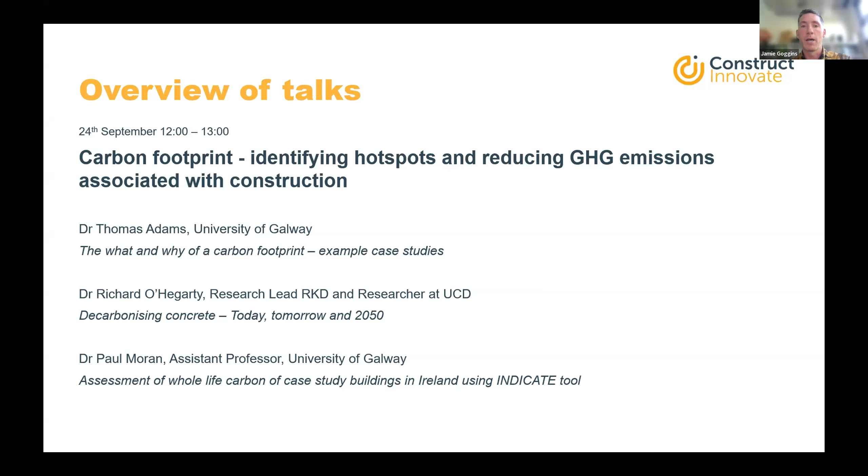I'm Thomas Adams. I'm just coming up to the end of my PhD in civil engineering at the University of Galway, and it was on the topic of sustainability reporting. A subsection of that I'll be talking about today is carbon footprinting, looking at the what, the why, and the how of the carbon footprint, with some examples and case studies from the construction industry.

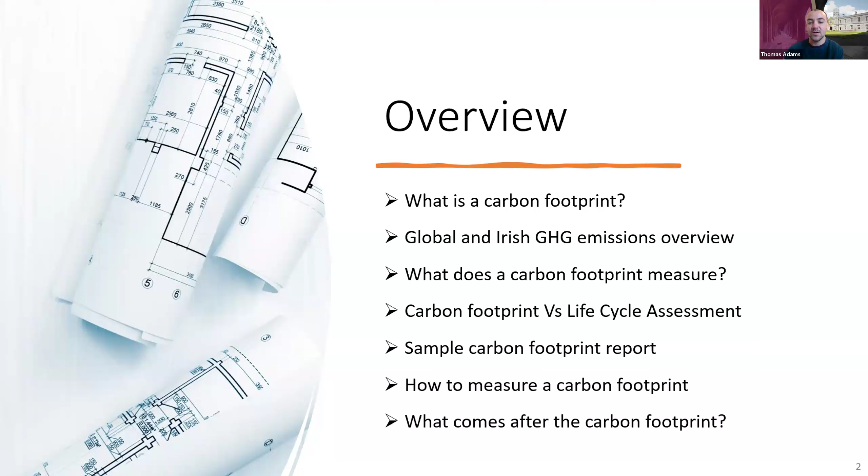An overview of the presentation: first looking at what is a carbon footprint, some global and Irish overview of the whole emissions picture, looking at what a carbon footprint measures and comparing it to life cycle assessment, and then a sample carbon footprint report, how to measure and what comes after you measure.

First of all, at a very basic level, what is a carbon footprint? It's a methodology to try and capture all of the greenhouse gases emitted from activities that we do. This graph on the left shows the four main greenhouse gases - carbon dioxide, methane, nitrous oxide, and fluorinated gases. The way the arrows jump in size represents how much heat each of these gases traps. Carbon dioxide actually traps the least amount of heat, followed by methane, nitrous oxide, and fluorinated gases, which trap loads of heat in terms of that greenhouse gas effect.

The pie chart beside it shows why we call it the carbon footprint - because carbon dioxide is the one we emit the most, by far. That's the idea behind the carbon footprint, a way of measuring these different greenhouse gases. They're also converted back into one unit of carbon dioxide equivalent, which is why we call it the carbon footprint. Methane, nitrous oxide, and fluorinated gases are converted into carbon dioxide equivalents, so we have one unit for measuring the global warming potential of our activities.

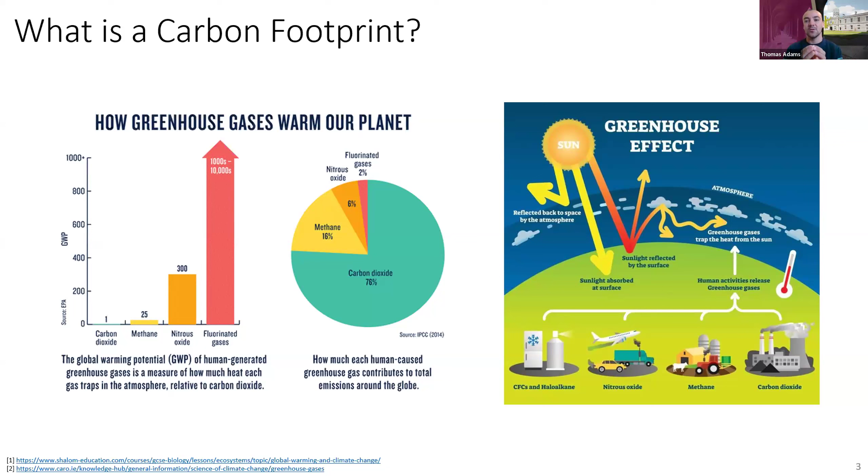This is an overview of the global greenhouse gas emissions, from 2016. It's probably changed a little since then, but it gives an overview of the different activities we do as humans that emit these greenhouse gases. I have some bullet points on the left linking the main ones to the construction industry - looking at energy use in industry, the first chunk there is iron and steel at 7.2%, which is pretty significant and fairly related to construction.

You'd think energy and transport, transporting construction materials to and from sites, would be fairly significant too. And then there's the big chunk of energy use in buildings - obviously that's the operational use of the building rather than its construction, but that's of course affected by how energy efficient we build our buildings and how we use them.

Looking at the small industry chunk there, 3% of that 5.2% is just cement. I'll let Richard go into more detail on that later, but you can see how cement makes it onto this big picture of everything we do. Cement is 3% of that big picture. And then waste, if we put our waste in landfills, it can be fairly significant. Also deforestation in some cases can be related to construction.

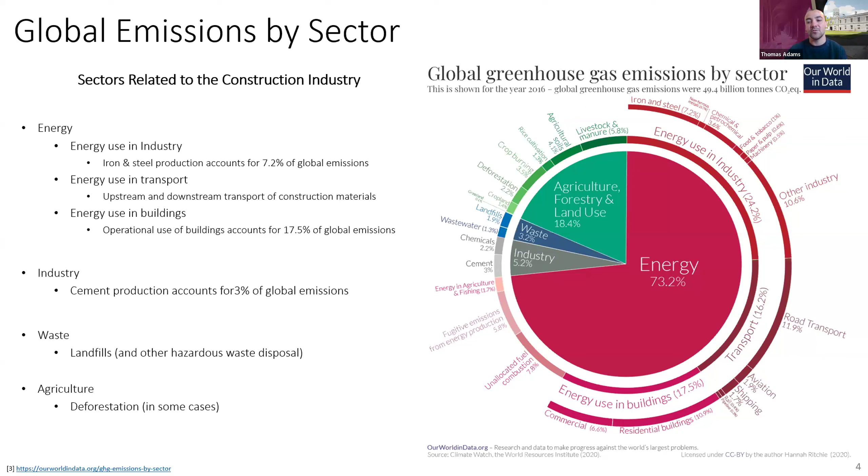Looking at the big picture in Ireland's case, this is the 2023 overall carbon footprint of Ireland as a country. You can see agriculture has that big chunk. As we all know, agriculture is the main source in Ireland, followed by transport and energy industries. The table on the right, the green shows that it was actually reduced from 2022 to 2023. Overall at the bottom, you see we actually had a relatively significant drop in emissions on a national scale for the first time.

I do think we had a drop the year before, but it was only about 1 or 2%. This time, whether or not you include land use change - LULUCF is land use change and forestry - something went wrong in the way we manage our lands, as we had such a big jump from our land use. But overall, there was a 4 or 7% drop, depending on whether or not you include land use.

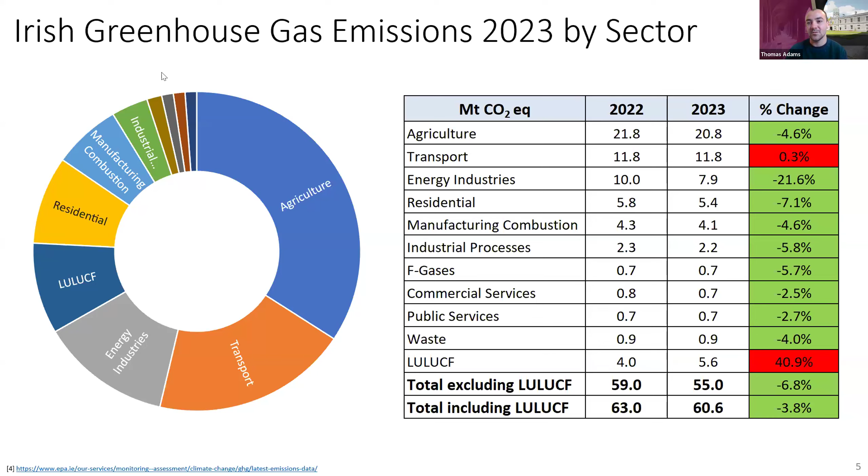So what is actually measured in a carbon footprint? According to the Greenhouse Gas Protocol Corporate Standard, which is the most commonly used standard globally for measuring carbon footprint, emissions are grouped into 3 scopes. Scope 1 is fuels burned directly on site, generally heating fuels, or company vehicles or machinery that burn fuels also.

Scope 2 is purely just electricity that you purchase from the grid. It's called indirect because the emissions aren't coming from on site, they're coming from wherever the electricity is produced. And then scope 3 is all other indirect sources of emissions.

The main ones here would be purchased goods and services, which is essentially the supply chain for your company - materials, products, and services that you purchase, and the emissions associated with buying those things. Another significant one is travel, mainly how employees get to and from work, but also if your company funds a lot of business travel, that can be significant too.

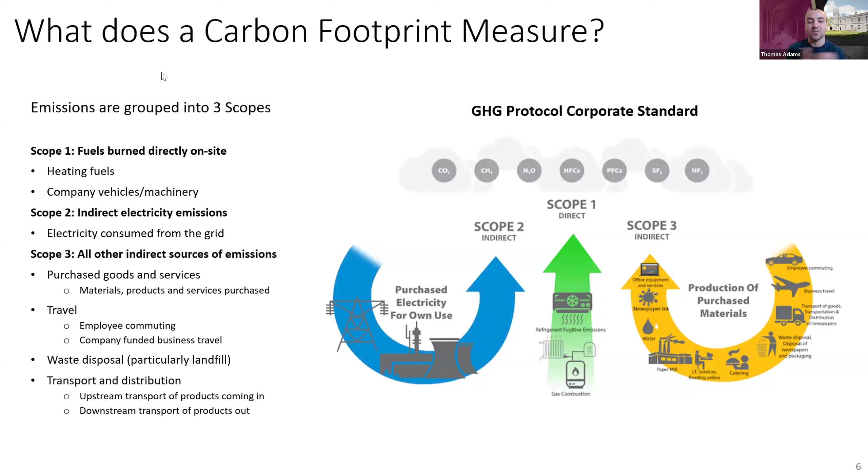Waste, as I was saying, if it's sent to landfill, that has a pretty significant carbon footprint associated with it. And also transport and distribution, particularly for the construction industry - moving heavy materials to and from site can have a pretty big footprint also.

Comparing this to life cycle assessment - Paul will go into more depth on that later - but to give an overview, this image shows how the life cycle assessment has 5 main stages: material extraction, then manufacturing and production, transport, utilization, and disposal. The life cycle assessment tries to get the full picture of a material from when we take it out of the ground to when we put it back wherever we put it back.

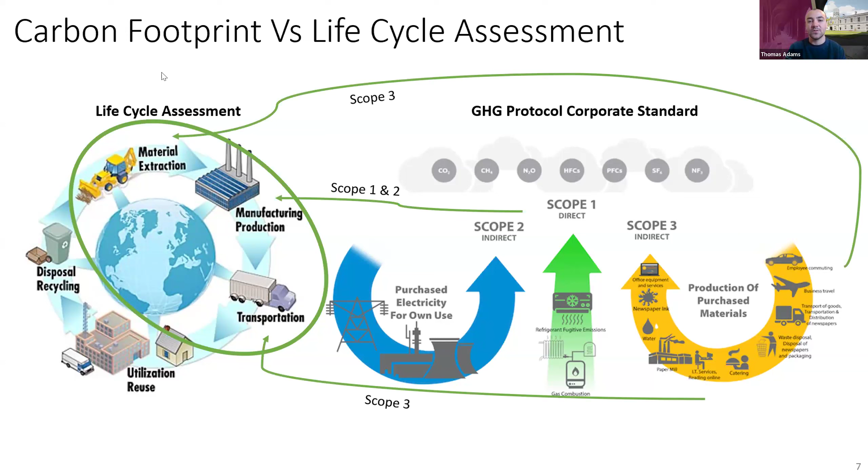Whereas the carbon footprint generally only covers 3 of these: material extraction, manufacturing and production, and transportation. You can map how scope 3 would cover material extraction, scopes 1 and 2 would cover what happens in the factory, and scope 3 again would cover transport away, but it generally doesn't take into account the other 2 - utilization and disposal. So just to note, the carbon footprint isn't completely extensive.

But the benefits of doing a carbon footprint are that it gives you that overview of the whole organization's activities and the emissions associated, which is useful for planning down the line. A life cycle assessment tends to focus more on one project or one product, whereas the carbon footprint is for the whole organization. It's also not as complicated to do as a life cycle assessment, so it's relatively straightforward - just a case of gathering a lot of data, which is generally the hardest part. And in terms of creating a pathway to net zero, measuring a carbon footprint is the first step in creating that action plan towards net zero.

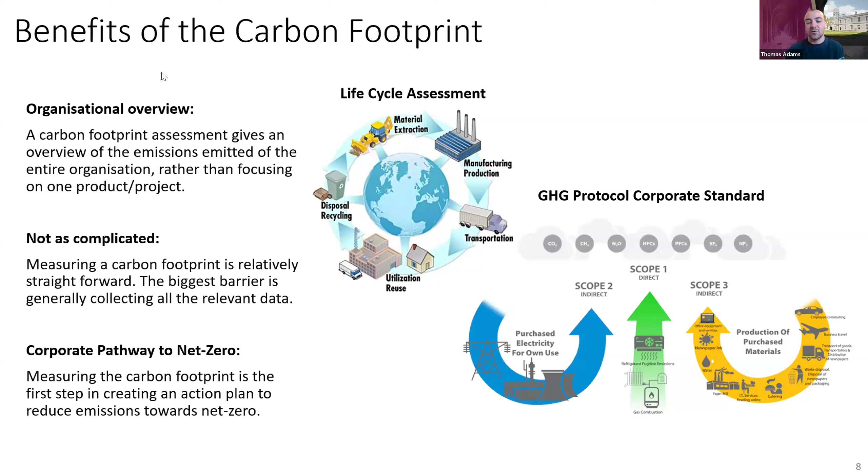Here I have a sample carbon footprint report. This is from an Irish manufacturer of timber frame, roof truss, and posijoist products. It's a factory with 60 employees, and they produce about 400 timber frame units a year.

You see the two small bits on the graph here, the black and the green, that's scope 1 and scope 2. So the heating and the electricity are those two tiny little squares on the left. Everything else is scope 3.

The yellow part is transport and distribution, that's the trucks taking the timber frames and roof trusses to site. The red chunk is travel, that's all 60 employees getting to and from the factory every day. And then you have the little chunk of waste.

These big blue chunks here are all the supply chain. I've separated them out a little by product because it was so huge. The biggest chunk is timber, which makes sense given that's their business, manufacturing timber frames. The next one is construction work, then metal products, and then other purchased goods and services. The key thing to highlight here is how the supply chain really has a very significant impact on the carbon footprint for a construction industry.

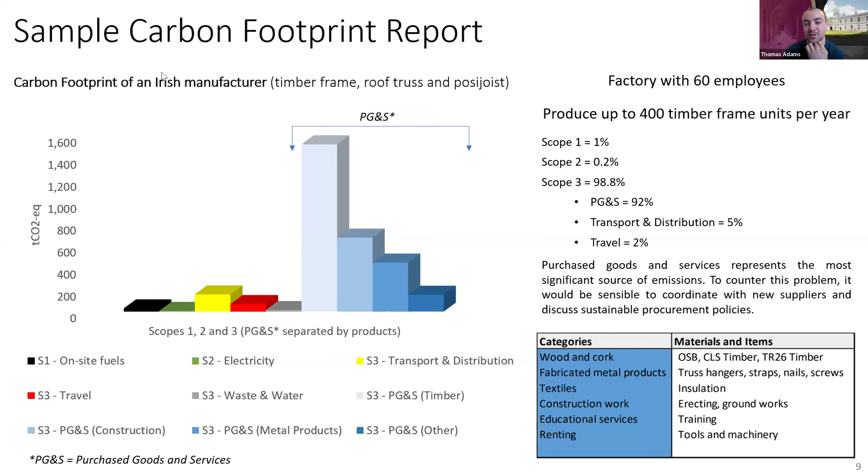This is the second last slide, just how to measure the carbon footprint. You start off by selecting a base year, which can be any given year. Going further back in time allows you to analyze the trend. If you could go back to 2010 and bring it up to now, you'd have a lot of data to look at in terms of where emissions went up or down over the years. But data isn't always available that far back, so generally we pick a year where we have all the data available and fill in from there till now.

Collecting the data is generally the most time consuming part. We recommend using a commuting survey to collect all the commuting data. And in terms of procurement data, the purchased goods and services data, it's easiest to sort those by the largest product, like the timber in the last example, or the largest supplier, to break the data down.

And then we also talk about activity data versus spend data. So for timber, for example, if we knew the weight in kilos or even the volume of timber ordered that year, that would be more accurate. You get more accuracy out of that data if you can get it in weight or volume, as opposed to the amount of money spent on it. But if you can't get it in weight or volume, we do have emission factors for spend, so we can still use that anyway.

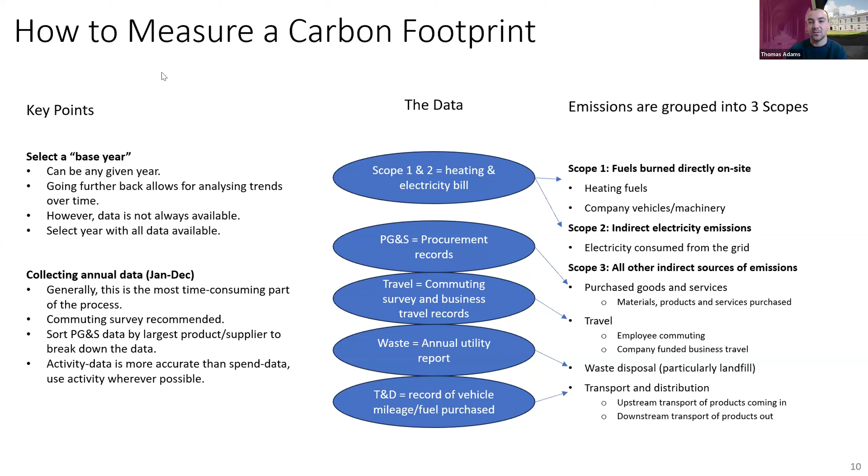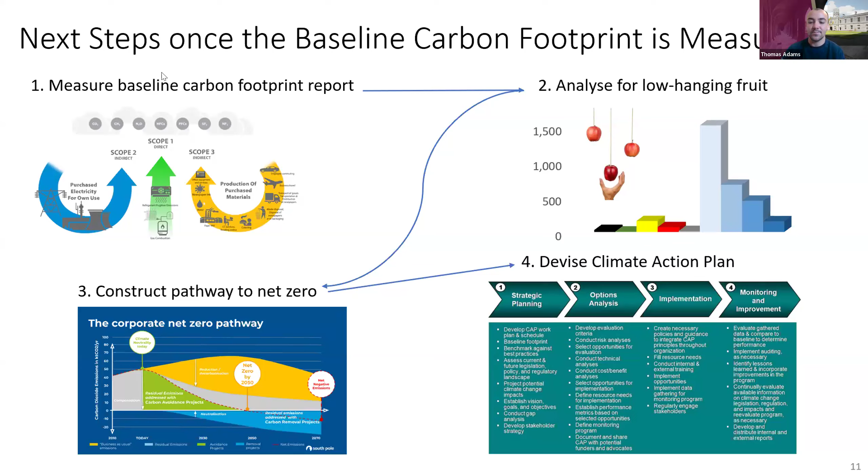Finally, the whole reason to measure the baseline carbon footprint is it gives you the chance to analyze where you're at and look for low-hanging fruit in terms of decarbonizing. Once you have that set out in terms of what you can decarbonize today, what you can do next year, what you can do in 10 years' time, you can put together your pathway to net zero, ideally bringing all those different emission streams down to zero. Then when you have that pathway, you can devise your climate action plan, breaking it down into a step-by-step process to decarbonize. And that is the end of this.

So that's a great introduction to carbon footprinting and carbon dioxide emissions, showing the level of emissions that can be associated with purchased goods and services for an organization.

When we built a large building at the University of Galway in a given year, the emissions associated with that building came to be nearly similar to all other emissions of operating the university in that year. And this is a university with 20,000 people, student staff and students, so a very big operation.

So we can see that construction has a very big impact on some organizations in terms of their overall carbon footprint, and therefore need to consider it if they're considering scope 3. So how are we going to decarbonize construction? One of the main components in construction that leads to large greenhouse gas emissions is the use of concrete and cement. Dr. Richard O'Hegarty is going to talk us through concrete and how we're going to decarbonize it from today, tomorrow, and all the way out to 2050. So over to you, Richard.

Thanks for the intro. As Jamie mentioned, the biggest hotspot when it comes to most buildings is concrete. So what we're going to talk about today is decarbonizing concrete - today, tomorrow, and 2050. Today being what we can do right now, tomorrow being the short-term horizon, and 2050 being the longer term.

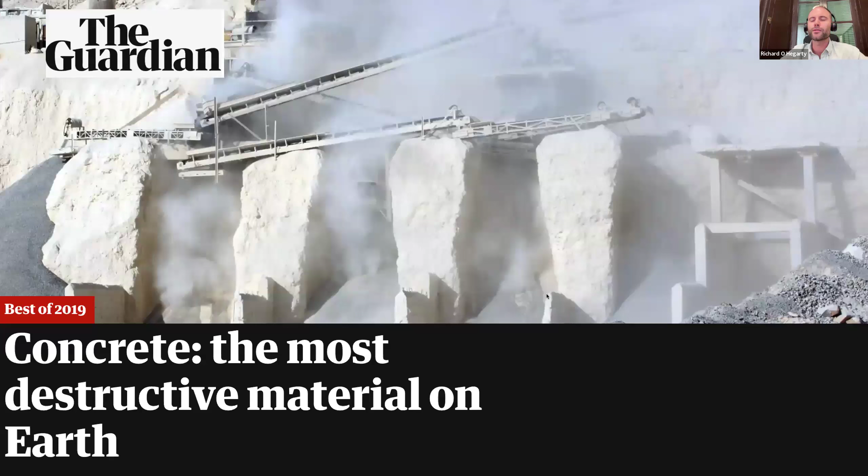Probably the best place to start is a provocative headline from The Guardian in 2019, which was: 'Concrete, the most destructive material on Earth.' An interesting choice of word, destructive. I would probably go with impactful, but let's go with their choice of word for now.

And yes, it would be the most impactful, or destructive to use their word, simply because it's the thing we use most of. This graph is a study of material flows in different countries with different income bands, and you can see that no matter where you are in the world, concrete is used, obviously at different rates. The shaded blue portion is your concrete, the darker blue is asphalt - I've included that to show there is a difference in, say, higher income countries versus lower income countries.

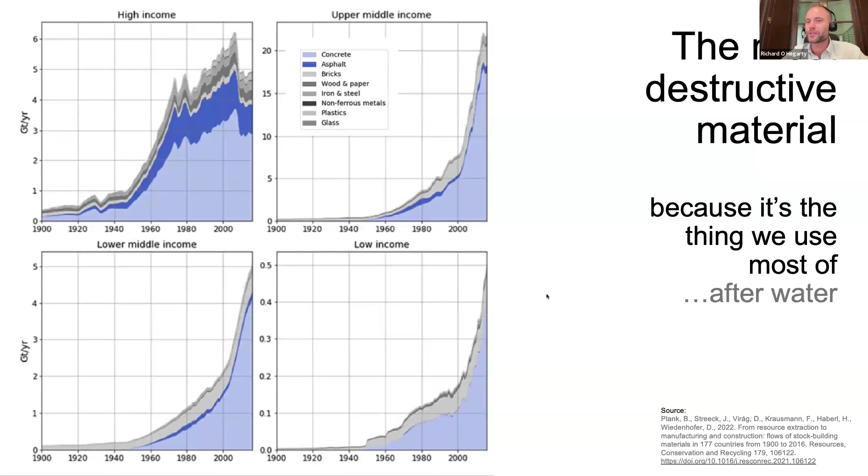So we use a lot of concrete, and I suppose the question is, why do we use a lot of concrete? The answer to that is long, but it can be found in this book called Stuff Matters by Mark Miodownik. It was recommended to me by my colleague in UCD, Oliver Cannan, and chapter 3 is called Fundamental - that whole chapter is about concrete, because that's what concrete is to modern society. It's fundamental. No matter what you do in your daily activity, concrete is involved somewhere.

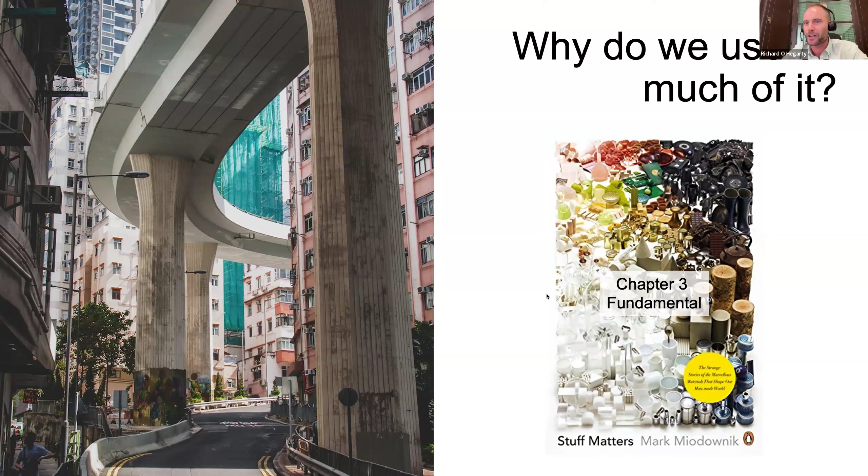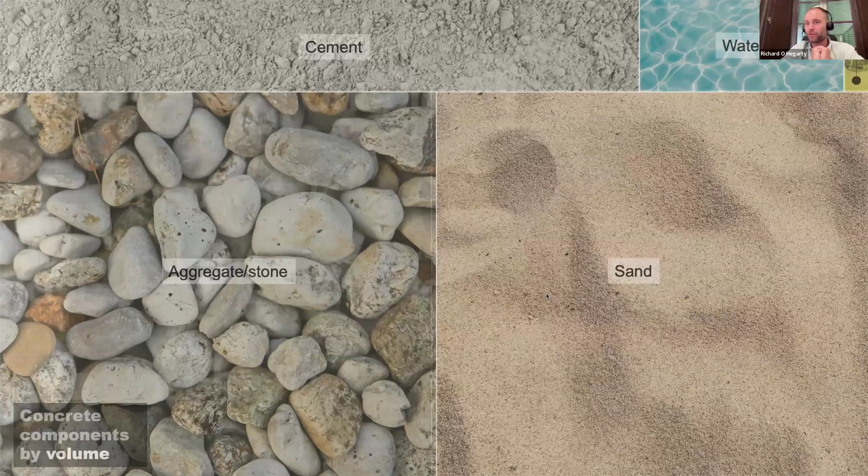But one way of looking at it, which can be quite useful, is to look at what it's actually physically made up of. In terms of volume, this is approximately what concrete is made up of - primarily sand and aggregates, about 80%, then a portion of cement, a bit of water, and then some chemicals. That's a useful framing if you're a concrete technologist trying to look at what's in the material itself. Since this talk is about concrete decarbonization, I think this can be a useful framing for how to actually look at concrete.

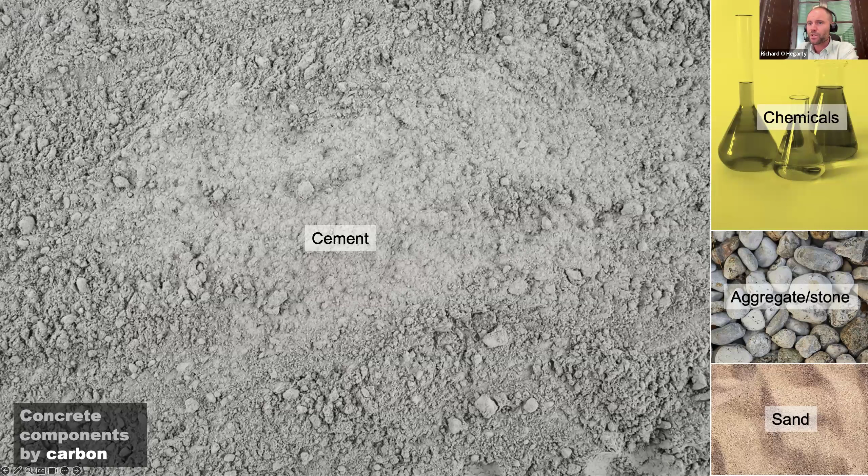You can clearly see that the big portion of emissions is in the cement. As noted in the last presentation, cement is a big portion of global emissions, and when it comes to concrete, the biggest portion of emissions is due to the cement. So why is that the case? Well, there's two major sources of emissions when it comes to cement production.

Approximately 40-60% - this can change depending on your manufacturing process - but approximately 40% is from the energy used to achieve the high temperatures required to burn limestone, a temperature of 1,450 degrees, pretty high. You typically need fossil fuels, but there are other fuels used. There's actually some progressive work being done in some Irish cement manufacturers.

So there are ways to reduce that, but the big challenge is the calcination part. That's conversion of limestone, which has the chemical equation CaCO3, into lime, and what you have left over is CO2. Obviously that's not good, and it's hard to break this because that's just the chemistry of converting limestone into cement.

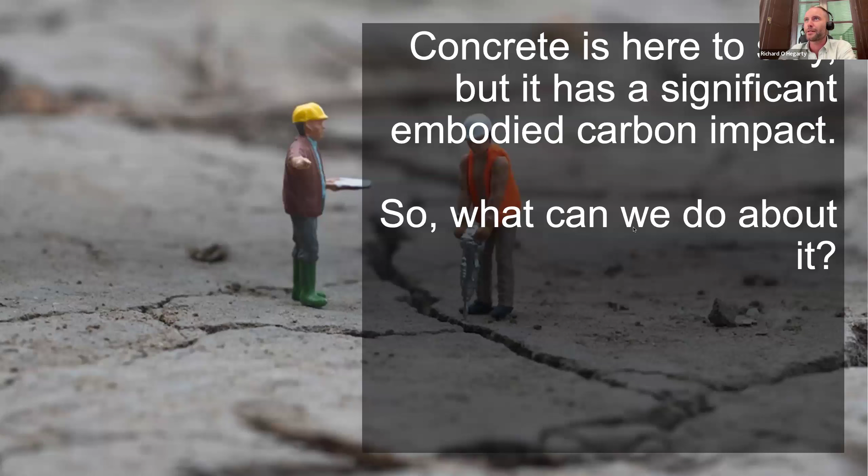So in summary, concrete is here to stay, but it has a significant embodied carbon impact. So what can we do about it? I think this is the crux of the presentation, and the framing of it is a 3x3 matrix: today, tomorrow, and the longer term. We've also categorized some of the solutions into use less cement, use less concrete, and capture more carbon.

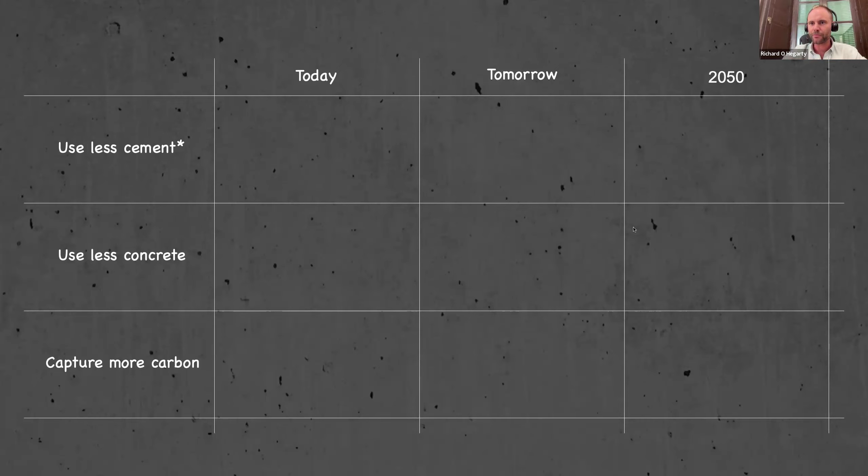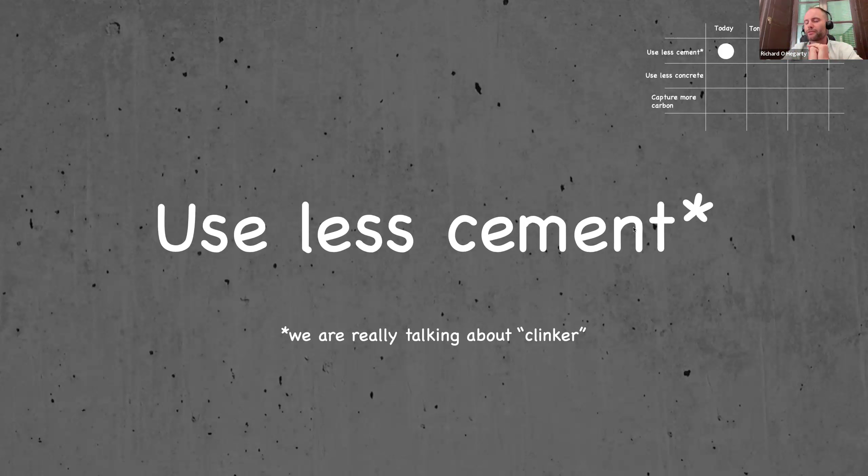Now, I've asterisked the use less cement one because really what we're talking about here is clinker. I appreciate there's different levels of knowledge in the audience today, so just to quickly explain: most cements, the main component is clinker, which is the product of the cement kilns. You typically then mix that clinker with other materials like gypsum, maybe limestone, things like that. But when we're talking about cement at the moment, we're talking about a high clinker portion cement, maybe a CEM1 or CEM2 for those familiar with the terminology.

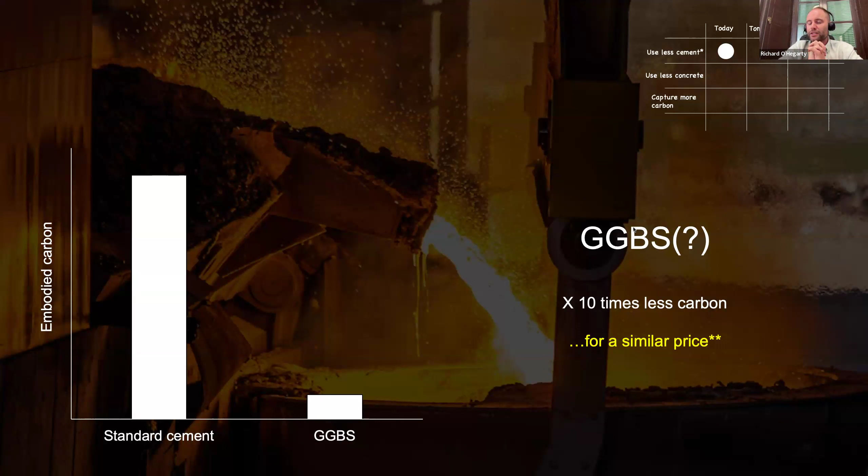So right in the top left corner of this matrix, in the use less cement category, what can we do today, especially in Ireland, is replace the cement with supplementary cementitious materials. The typical material used in Ireland is GGBS, which is a great material in terms of carbon - it's approximately 10 times less carbon than cement. It also has some durability benefits, and there are some technical differences, but this can be done today. It is done today, in various percentages. The cost fluctuates, but it's approximately a similar price.

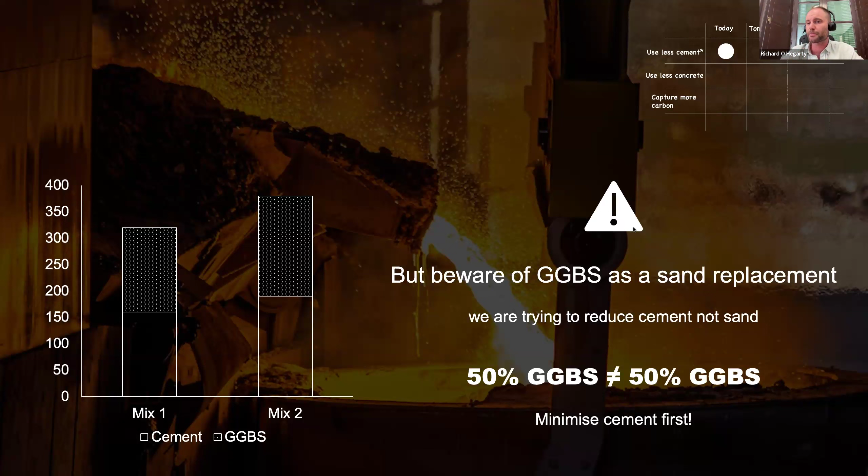There's loads of things we could talk about in terms of GGBS - you could have a whole presentation on it - but one important thing to point out is that if GGBS is being specified, it's important to specify it as a cement replacement and not a sand replacement. So you can see here with mix 1 and mix 2, both have 50% cement, 50% GGBS, but the important thing is you also have to minimize your cement. So if you're using GGBS, ensure you're reducing the cement content - you're not using the same cement content and just adding in more GGBS.

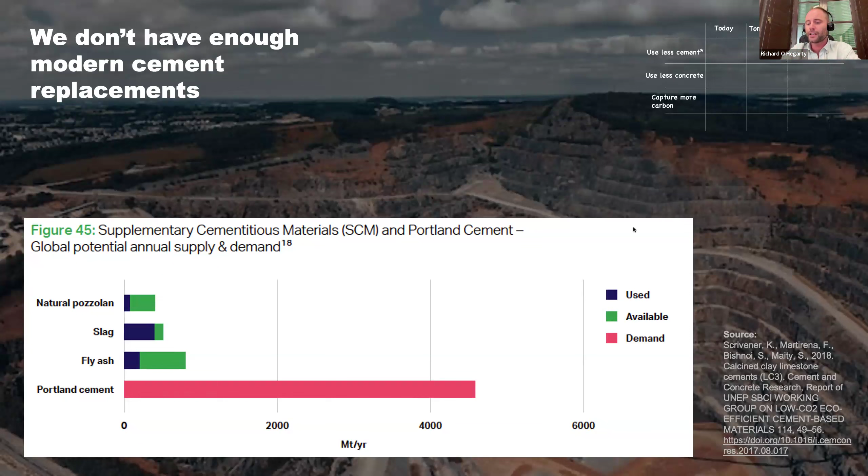Right, so that's what you can do today. As we move down the line and start using GGBS, fly ash, natural pozzolan - which are typically used today in different countries - we will run into a problem, which is a supply issue. That's not a problem right now, but it will be in the future, in the short-term future. What we need to be aware of is that we don't actually have enough of these materials to completely replace cement. So a bunch of researchers, I think from Switzerland, looked at this.

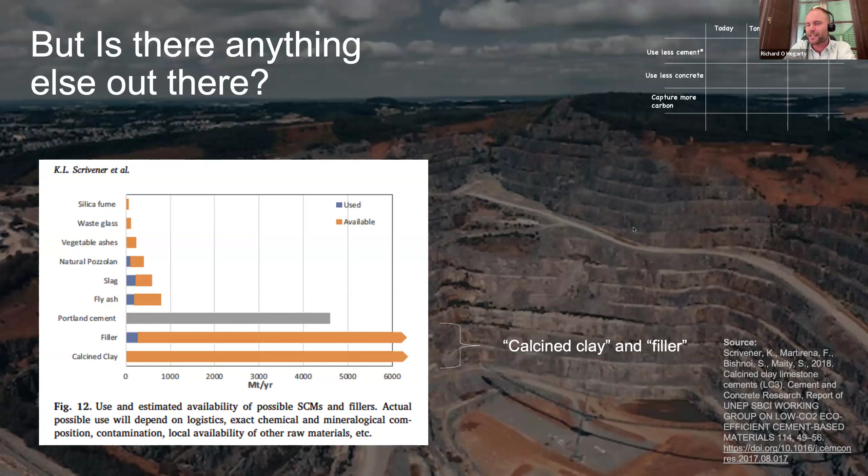What they saw was they picked out two materials that they think are going to solve this problem, which is filler and calcined clay. Calcined clay is interesting in that the major deposits in the world are actually in places in the developing world, where we're actually going to need to develop and use more concrete - there are good deposits of calcined clays there. They also note filler - filler is essentially just crushed limestone. It could be other things as well, but primarily it's limestone fines. I would probably argue that filler isn't exactly the same as these in that it's inert, or at least partly inert - there is some research questioning whether it does something at an early age - but generally it's not the same as the others, though it can and should be used if you can reach your technical requirements. So that's on the tomorrow side of things.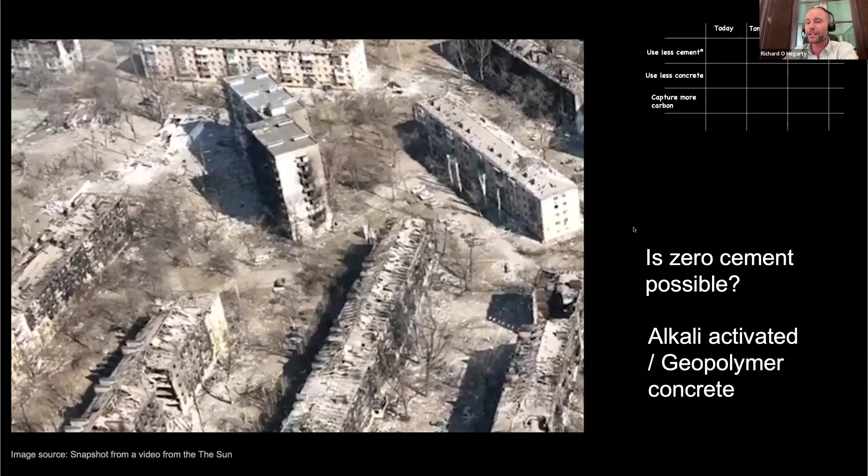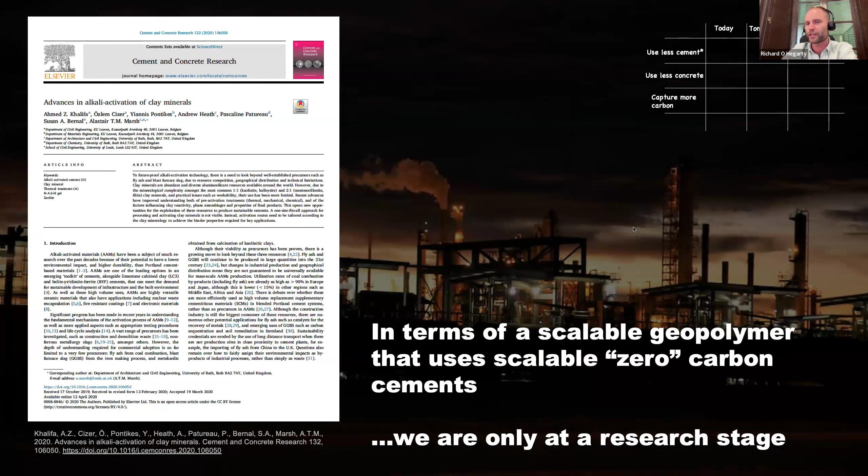This is the interesting thing about this - the reason for building these buildings out of this kind of no-clinker cement wasn't because of any sustainability reasons, but rather because of what was actually available in Ukraine. Ukraine is a big steel manufacturer, and there's lots of slag, so they used that and came up with interesting innovations in cement and concrete. But most geopolymers today use materials which have kind of supply shortages, so when it comes to scalable zero cements, we're really at a research stage. This is just a paper, you can take a screenshot and have a read in your own time, but we're at the research stage when it comes to that.

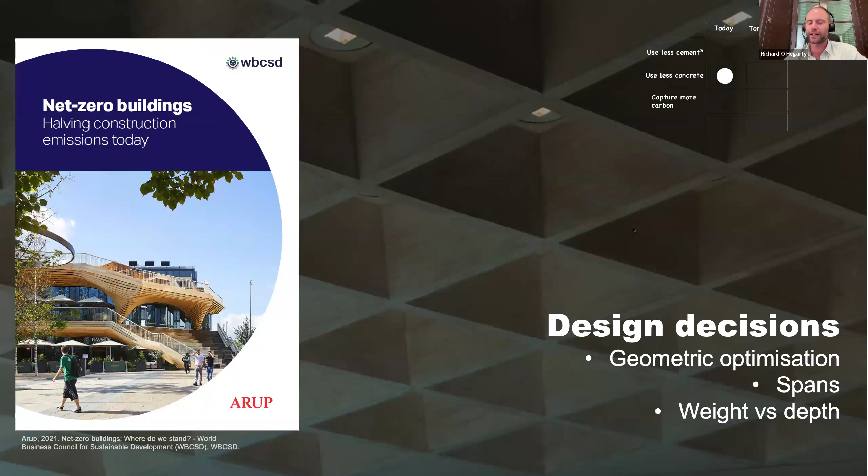Now into the next topic, we're into the 'use less concrete' idea. This is important because the best way to reduce embodied carbon is to use less materials - no different for concrete. If we can reduce the amount of concrete, that would be ideal. I'll simply refer you to an excellent report by WBCSD and Arup with very simple guidelines on how to save concrete in your structural designs. Three of them here: geometric optimization - you can see that waffle slab idea in the background, you're saving on material there. Also your spans - for any structural engineers out there, you learn this in your first and second year, span to depth ratios, and also weight versus depth. There's simple guidelines there of what you can do today. I'm sure many of you do these already, but it's just a matter of pushing them on.

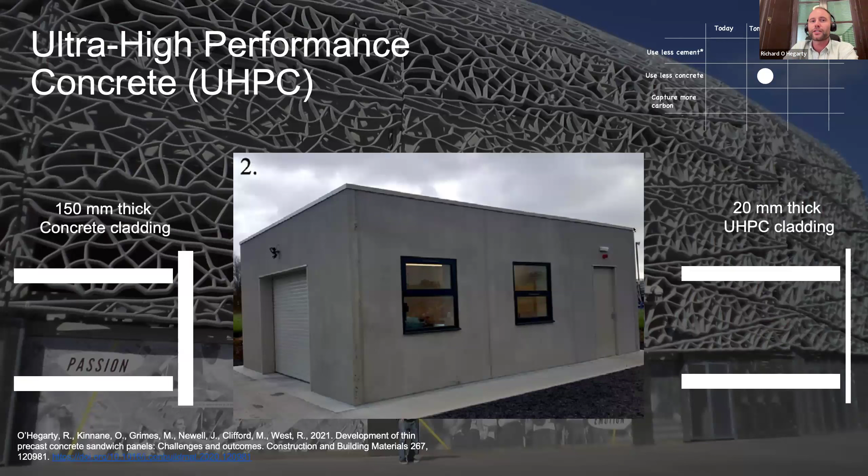In terms of tomorrow, what I've put here is ultra high performance concrete. This is an example stadium in France, I think it's a rugby stadium, and that cladding is ultra high performance concrete. This is kind of the show-off use for it because you can do fancy stuff with it, and that's great, but there are also carbon saving benefits. This is some research we did in UCD on using ultra high performance concrete to reduce the thickness of planar cladding, and what we found was we could reduce the thickness by quite a considerable amount. When we published results on this, we found you can approximately achieve about 40% carbon saving by using UHPC instead of standard concrete for cladding. Our mix was optimized for embodied carbon as well - we did use GGBS and some limestone too. But that just gives an example of some of those savings.

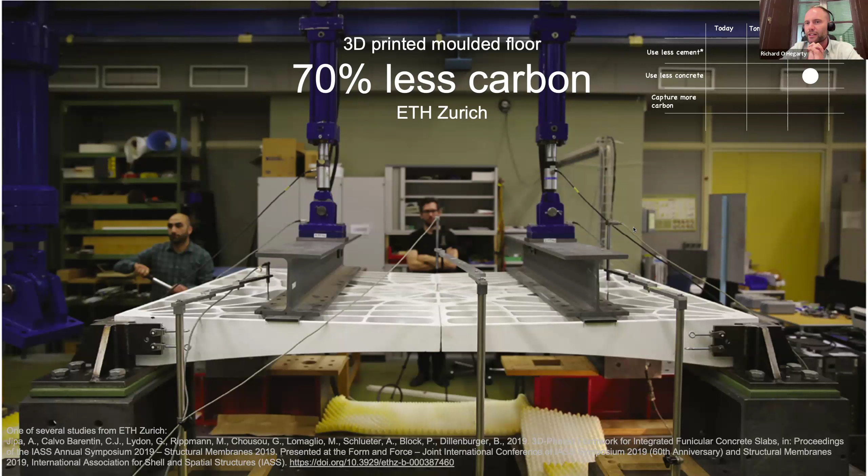As we enter into the 2050 realm - I'm probably being a bit harsh calling this 2050 stuff, this could technically be done today - but this is kind of serious geometric optimization. There's a research group in ETH Zurich which has been looking at this for maybe a decade now, optimizing this. There are real case studies now using this technology, mixing concrete technology but also this geometric optimization of the form. The reason a slab is rectangular isn't because that's the optimized geometry, it's because that's the easiest thing to make. So these guys are looking at how they can optimize that geometry, and there are other research groups looking at this sort of thing as well.

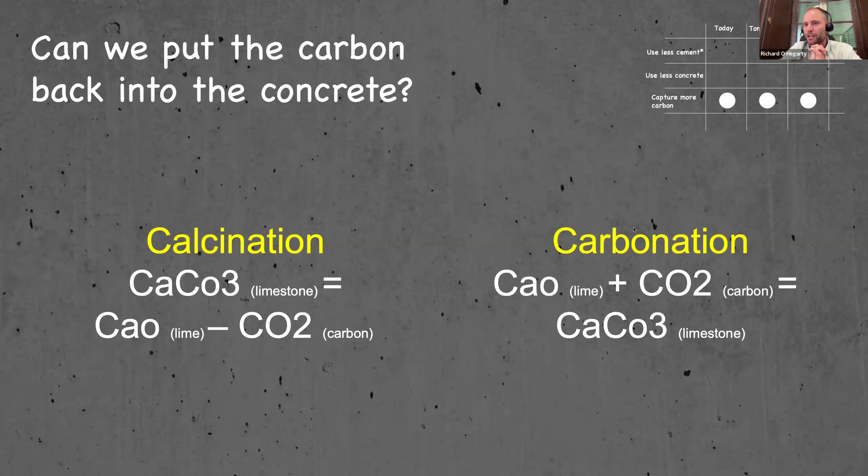Now into 'capture more carbon.' Just before I get into it, I'm not talking here about carbon capture, storage, and utilization at cement factories - that's a separate topic that could be discussed in a different talk. I'm talking about capturing more carbon in the concrete itself. So bear with me for a second, just a little bit of chemistry. At the start, I showed you what calcination is, how you make cement ultimately - you have limestone, then lime, which is the precursor to clinker and cement, and you have CO2 left over. We obviously don't want that. So the question is, can we reverse the chemical process? Yes, we can, and it actually has a name - it's carbonation, and this actually happens with normal concrete anyway, but it's typically a very small percentage of what was actually emitted.

Just in terms of today, what can you do today? There are some companies in Ireland that are actually using this - it's called CarbonCure, a technology which saves approximately 4 to 6%.

And they do it by injecting the material into the concrete during batching. An advantage of this is that it's quite simple and handy in that sense. It's obviously a small saving.

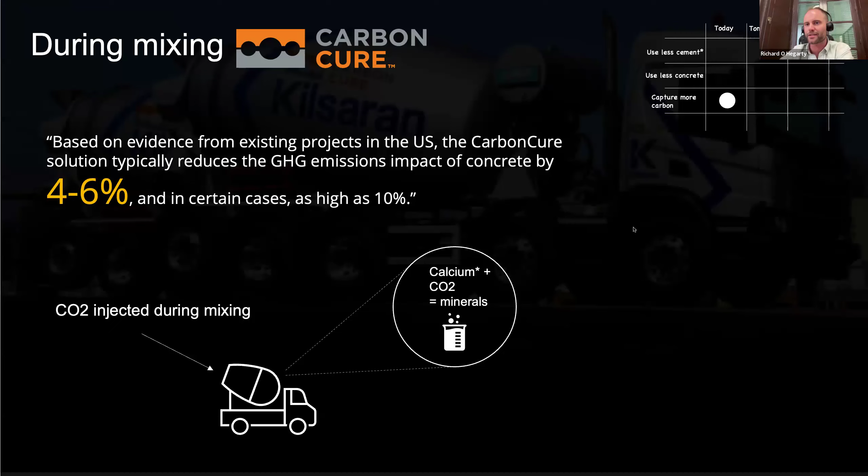There has to be caution that if using such technologies, you're not actually increasing cement or things like that. I'm not sure that happens, but it's worth noting that for any marginal saving when it comes to decarbonization, you want to ensure you're not increasing it in another direction.

In terms of tomorrow's ideas, there's a technology called Solidia, which combines two technologies. Part one is CO2 curing, which is actually used typically today in precast concrete to cure concrete, but typically it only absorbs a small amount of CO2. With this technology, they've also optimized the materials, and by doing so, it absorbs more CO2.

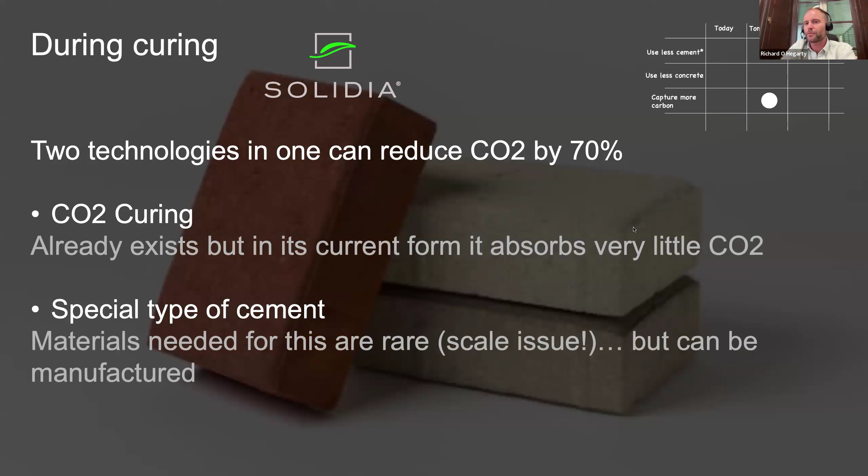The problem with this kind of technology is, again, that scalability issue. But at the start, we talked about the fact that cement is only a small portion by volume. And if we're talking about capturing carbon, should we not really be focusing on this portion? Can we not create sands and aggregates which absorb CO2?

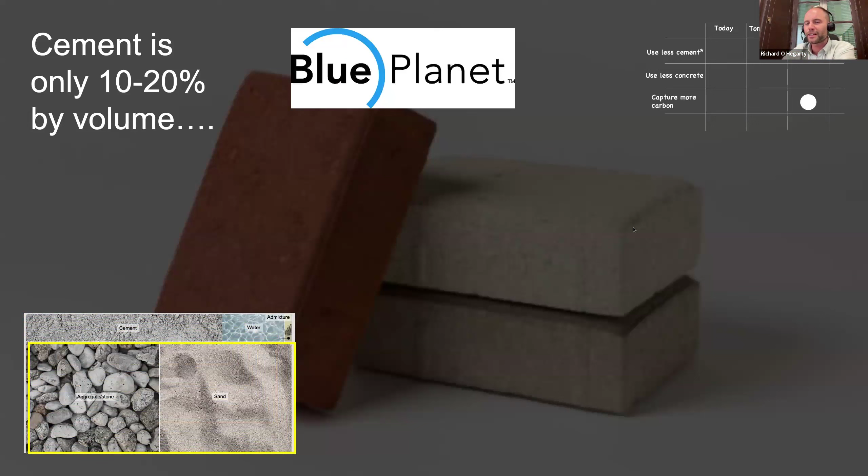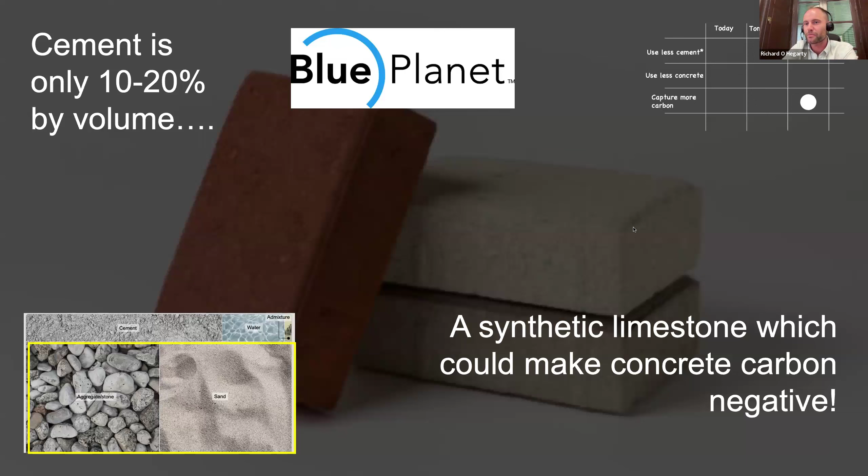There is a company looking at this, I think in the US, called Blue Planet, not to be confused with David Attenborough. What they're doing is generating these synthetic limestones. The technology behind it isn't completely clear, but the concept is interesting, right? Because the thing we use most of is concrete. If we have to capture carbon in the future and utilize it, that utilization portion, I think concrete makes for an interesting case study.

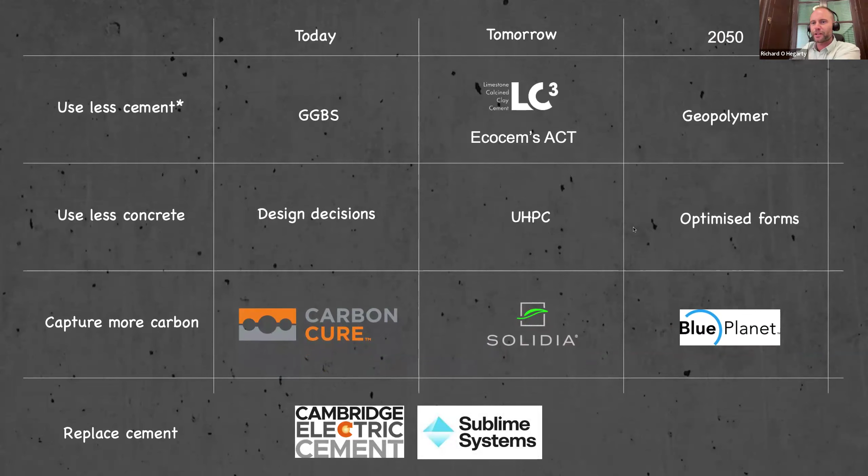This is kind of a lecture in CPD I do in UCD and RKD, but every time I do it, I have to update it because there's always new research, and there's two technologies I'm going to quickly talk about which have emerged, well, on my radar recently anyway. Maybe they've been out there for a long while.

But first is this Sublime Systems. It's an interesting technology in that the innovators of it are cement chemists, and they looked at what's the end result of cement - this calcium silicate hydrate paste - and they're thinking, why are you doing it that way? This would be a more efficient way, this way being this kind of electrolytic reactor. Don't ask me what that is, I don't really know. But what's interesting is that it uses electricity and non-carbonate materials.

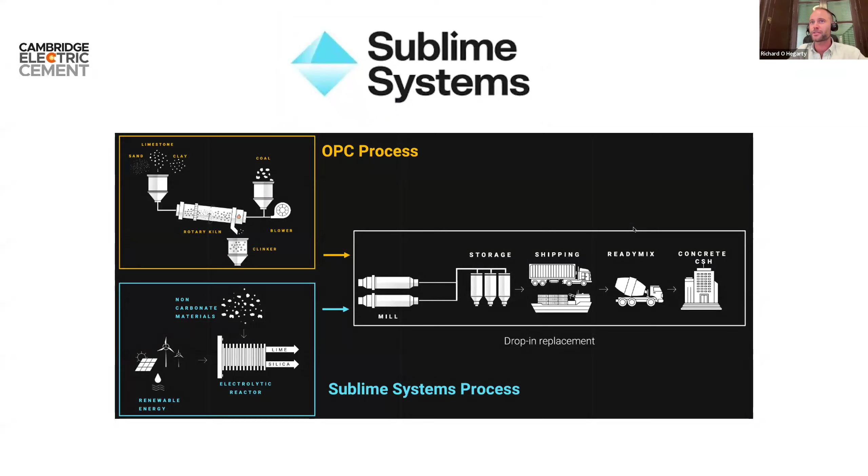So that's kind of interesting - check out their website, it's really good, really interesting, lots of detail there. And then there's this one which has emerged recently, which again is very interesting. I think it's obviously caught a lot of attention - friends of mine who don't know anything about concrete or have no interest in concrete are sending it on to me. I think electric cement has a nice ring to it, and then also that Cambridge portion.

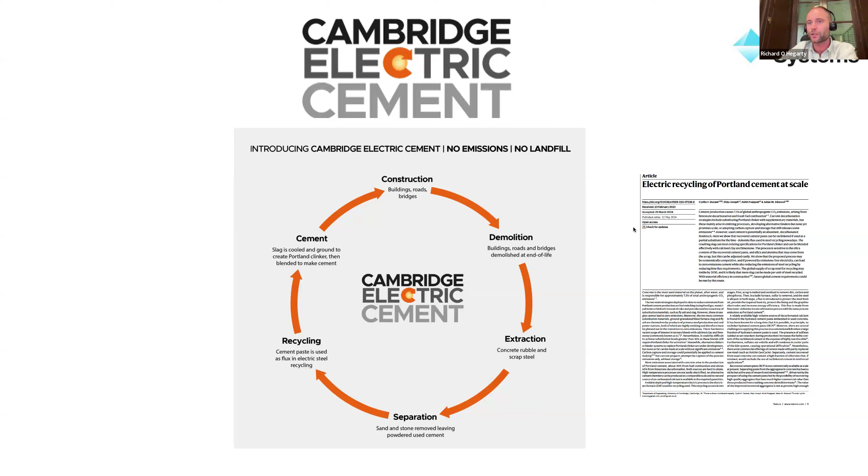But it is interesting, and what they're doing is replacing the flux used in electric arc furnaces with recycled cement paste, and that is interesting. I think scale is again going to be a challenge here, but certainly an interesting technology to look at. I think another thing they note in the paper is that the quality of product also depends on the input of that recycled material.

So that's kind of the overview of the presentation in terms of decarbonizing concrete. I also just want to refer to the report that Jamie mentioned at the start, which is a report led by RPS with ourselves in RKD and EY. If you're looking for some detail on how to procure low carbon concrete, you will find it there.

So thanks for that, sure, that's a great run through. So some ideas there around decarbonization of concretes and cements today and in the near future and the long-term future. And Richard could probably have talked again for another hour with lots of other options in there as well. But that just gives a flavor of some of the things that are there.

So I'm going to move on to our third presenter now. Third presenter is Dr. Paul Moran, who's an assistant professor at the University of Galway. And he's going to talk about assessment of whole life carbon of case study buildings in Ireland using the Indicate 2 tool.

Okay, hello everybody, thanks for coming along to today's session. So I'm just going to present on behalf of Stephen Barrett, who, as Jamie mentioned, couldn't be here today. Essentially, this is the results from a project between ourselves here in University of Galway and the Irish Green Building Council, where we went about developing a methodology to assess the whole life carbon associated with the way we're constructing our buildings right now in Ireland, and then developing baselines for where we're currently at.

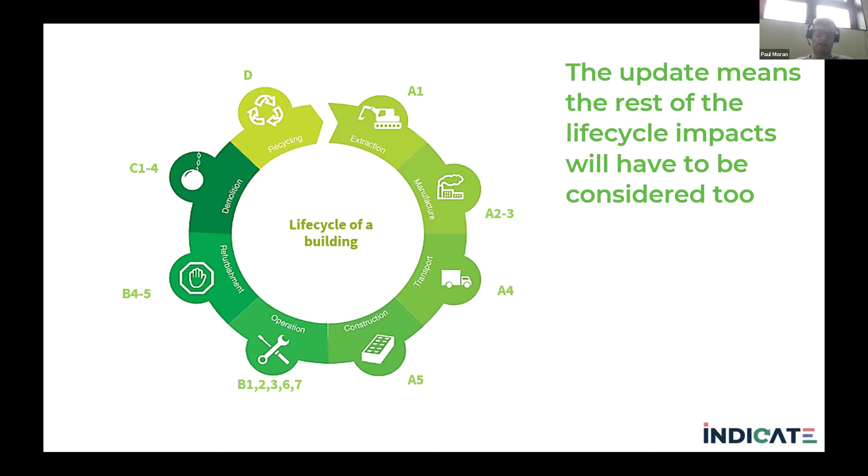So as part of the project we're working on, the first task was developing the methodology to assess the carbon. Once we had this methodology developed, we then applied it to all our different case study buildings.

To assess the carbon associated with all these different stages, we essentially needed a series of bills of quantities for the various different buildings, and then using the best available data sources that we could find that would be relevant to Ireland, we set about assessing the carbon associated with each of these different stages.

For example, for the A1 to A3 stage, using the bill of quantities of all the different buildings and a database of carbon associated with different building material products, we were then able to calculate the carbon associated with A1 to A3.

Then taking assumptions from various different sources, as I mentioned, we set about calculating the carbon associated with all the different stages of the building's life cycle.

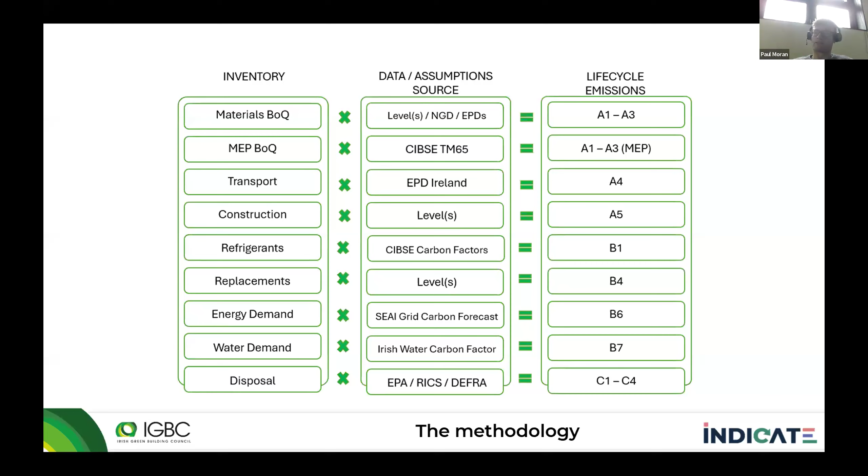So essentially, the crux of the tool is you have to enter the quantity of material in kg for the materials going into the building, and then using EPDs or a carbon factor from our database, you're able to calculate the carbon associated with that particular material or product.

From the MEP side of things, that's quite a challenge right now in calculating the associated carbon, and it's probably the biggest limitation we have right now, just with the way data is available and the way MEP is reported, and also the carbon associated with the MEP itself. That's a challenge currently existing in this area and something we're trying to address moving forward.

As well as that, we ask the users to estimate or input the energy demand of the building per annum, and any refrigerants or water requirements that the building also has.

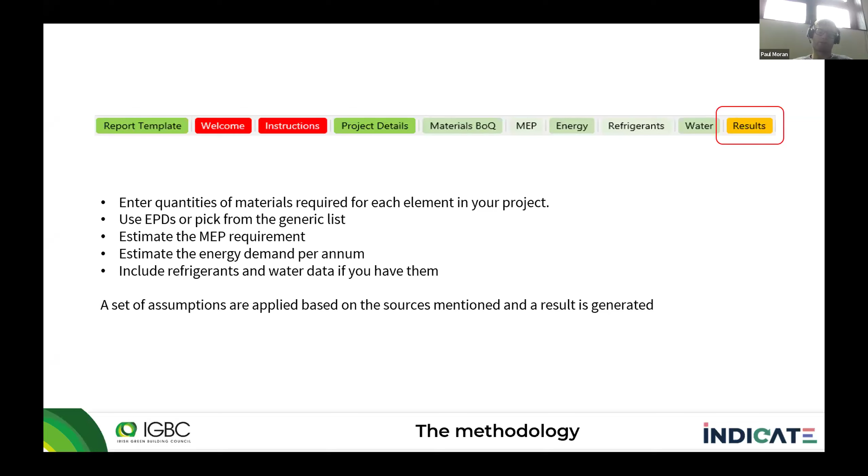Taking all these different sources, we're then able to calculate the carbon associated with the building throughout its entire life cycle. The tool itself gives a breakdown of the upfront carbon associated with how we construct our building - how much carbon we use to produce the products, how much carbon is required to transport the products to site and construct the building, and the whole life carbon as well.

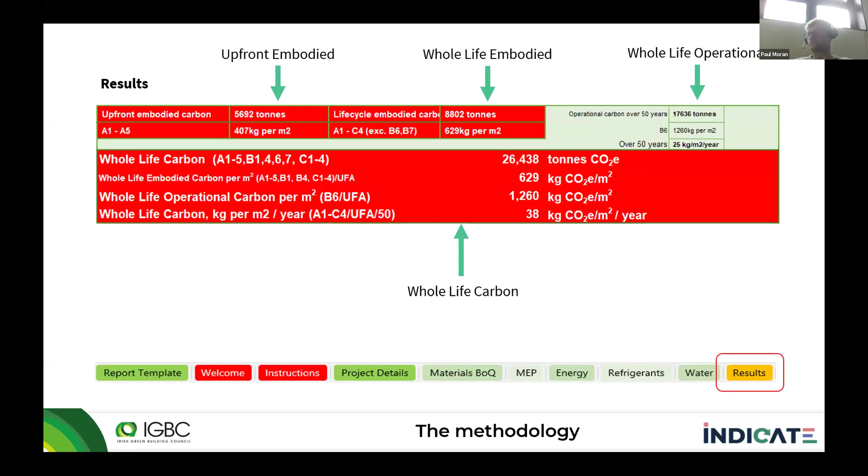So we're able to break down essentially where the carbon hotspots are associated with the building. Within the tool itself, you assign the material product to a specific area of the building, and at the end you're able to identify where all the different hotspots are within the building itself.

Using this approach, you're then also able to calculate how complete your LCA is of your entire building. This adds transparency to how much of your bill of quantities you've actually set as part of your assessment, and it also helps us when we're verifying and reviewing any assessments sent back to us, to make sure everything is to a high quality standard.

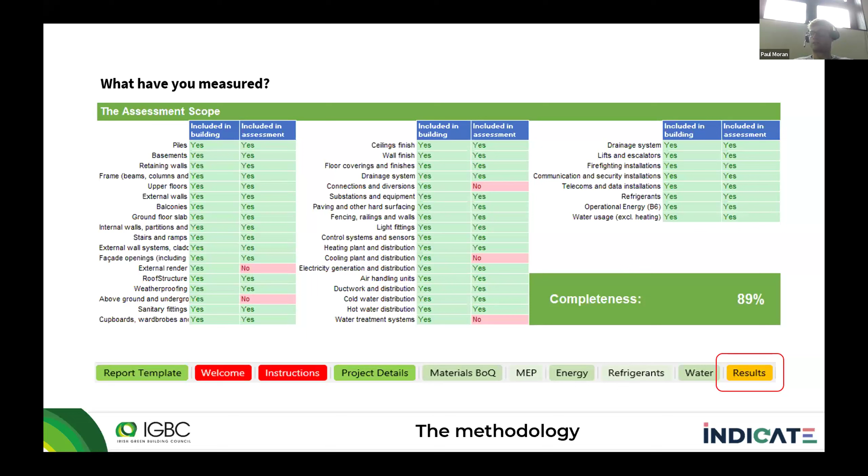The more generic data you use as part of an assessment, the lower data quality score you will have. And if you're able to rely on more EPD-based information, the higher data quality score you will have. That helps us consider how accurate your assessment might be as part of the project.

The tool will give you a breakdown of all the different tiers or elements of your building, from your substructure, structure, non-load bearing elements, roof, fittings, etc. It gives you a breakdown of the carbon associated with them, and tells you what the most impactful materials are currently within your building design.

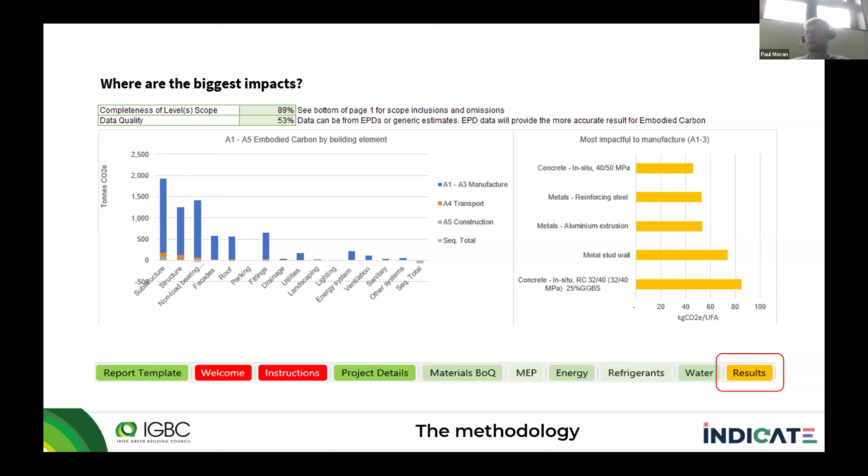We also have a draft template report that the tool provides after you've gone through the assessment, giving you a summary overview of where the carbon is associated with your building.

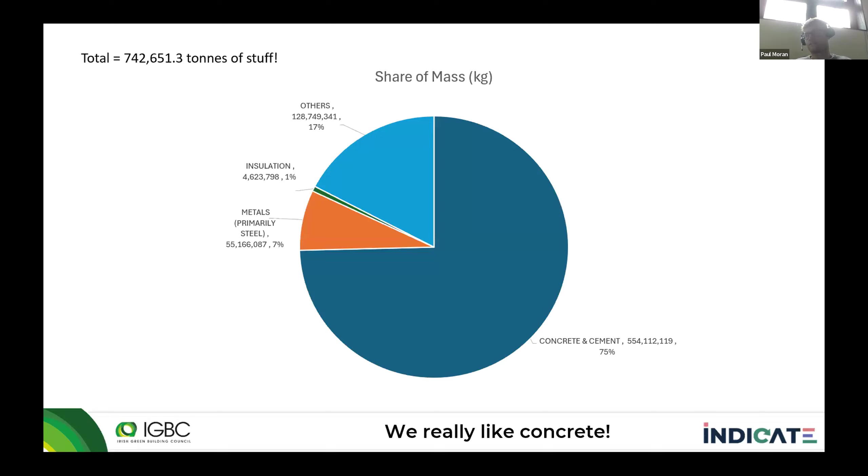So the data we have now, in terms of the amount of mass within the buildings we've assessed, shows there is a lot of concrete and cement. Nearly 75% of all the mass is associated with concrete and cement, and then 7% is associated with steel.

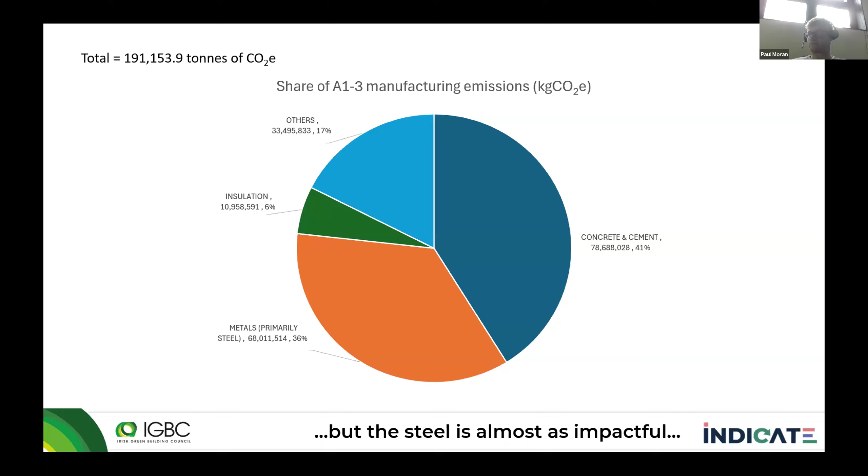When we look at the A1 to A3 carbon associated with our buildings, concrete and cement are currently contributing 41%, with metals and steels at 36%. So they're having a big impact on the way we're currently designing our buildings.

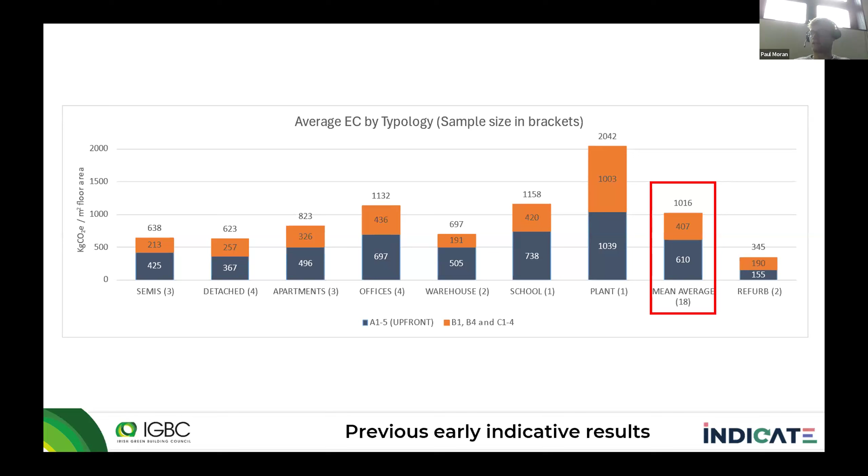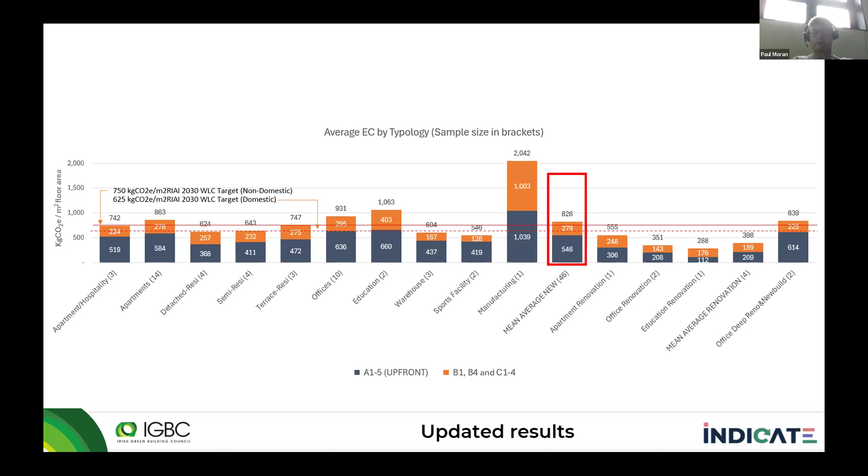The more case study buildings we can compile as part of this, the better benchmarks we can set moving forward, and the better we can reduce the carbon associated with our buildings.